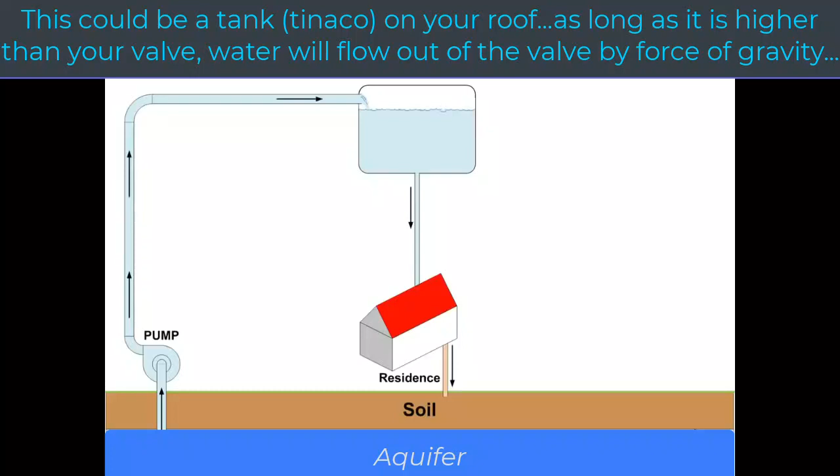So here is your public utility for water. Somewhere there's a pumping station, whether it's pumping it out of a well in the ground, out of an aquifer. Aquifer, that just means groundwater, or actually it's a pool of water in the ground. It could be an underground river as well. In Michigan, in western Michigan, where I spent quite a bit of my life, they actually pump the water out of Lake Michigan, and there's a pumping station halfway between Lake Michigan and Grand Rapids, which is about a 35-40 mile distance.

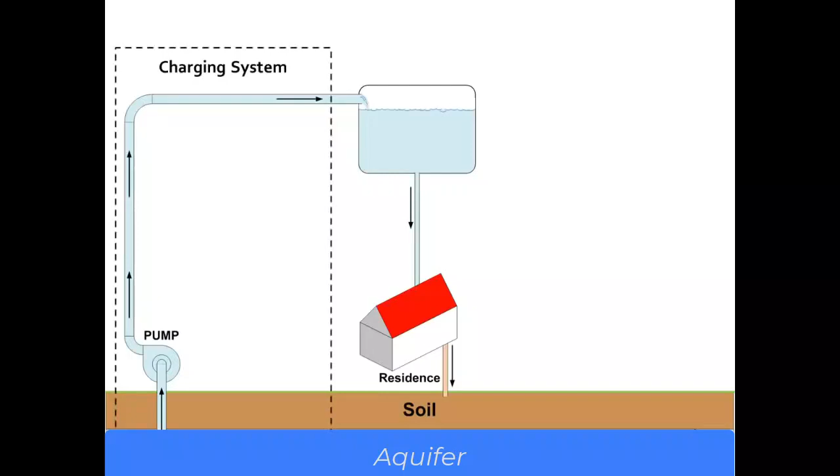So water is pumped out of some large endless reservoir of water, underground or a lake, and it's pumped into a tank. This is the charging system. So we're going to charge our system with a pump, an electrical pump that will have some controls on it, and we want to keep this tank as full as possible. The tank itself is storage. If there's no water in that tank, there is no force of gravity on the water that's felt down through the pipe. If we open a valve in the house, we have flows.

So water flows out of storage through the residence, through the drain into the soil. It could be a septic tank, or it could actually go to a waste treatment facility. We'll just say it goes into the soil in a septic tank. And if you know anything about septic tanks, the solids settle to the bottom, and then the water leaches out into the soil. And as it travels down through the soil, it's filtered and cleaned and purified, and then it goes back into the aquifer, or somehow it gets back to the source.

How much flow that you have, if you think about this, let's say that's 10,000 gallons up there. If you opened the valve, why wouldn't all 10,000 gallons come down instantly?

Well, you realize that's absurd, but we're just making a point here. Why wouldn't all of that water come down in an instant? That's because flow is limited by resistance. So pushing back against the force is the size of the pipes, the valves, changes in direction as the water flows down and goes back to the soil.

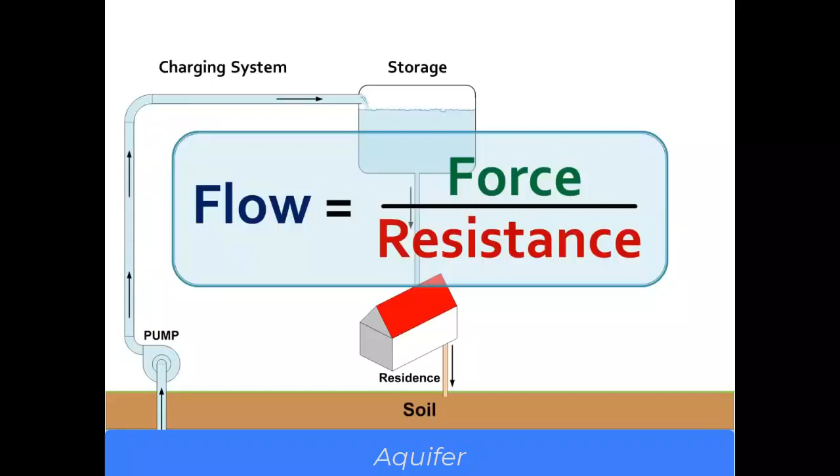Well, let's quantify our public utility freshwater system here. If we want to quantify the amount of force, we're going to do that in terms of head, and we'll do it in feet. So head pressure is the height of the top of the water column above the point where you're going to use it. And that includes the water in the tank too.

Now, if this tank were twice as large in diameter, but the water level still was no higher than what you see here, the head pressure would remain the same, even though you're thinking, well, there's more water up there. This is done with a vertical column. So if you travel straight up the pipe, and when you get to the bottom of the tank, you keep going straight up to the water level, that's what you're measuring. You're measuring the amount of weight straight down through that pipe, and that's measured in head.

You can also relate it to pounds per square inch. And what we're talking about is gravity, right? Atmospheric pressure, gravity pressure. If we take that same tank, and in a case where there's high water usage in your neighborhood and the pumping station can't keep up with the usage, and that's not uncommon.

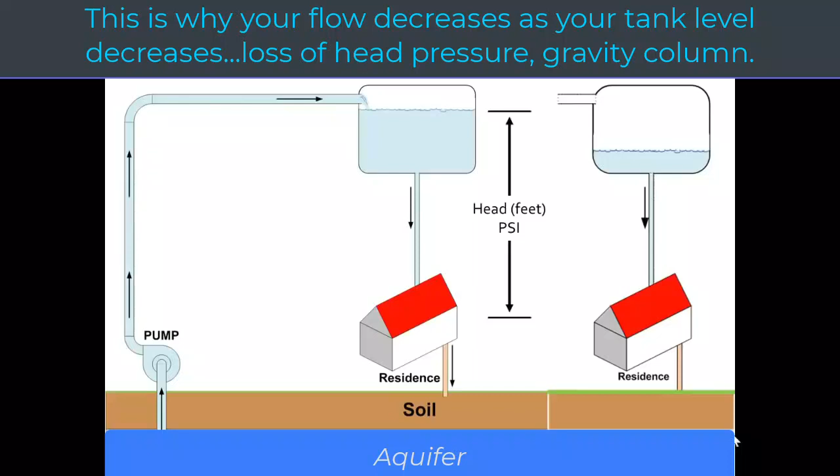However, the pumping station takes into account that that tank can get almost down to empty. As long as it can keep it from going empty, everybody has some water. But the water pressure does reduce because the head, or the height of the water, the top of the water column, is now lower, so you have less pressure.

This would be very easy to compare to a battery. When a battery is fully charged, that's like a full storage tank. As the battery discharges, like when you're starting your car on a cold winter morning and it's just cranking away, and pretty soon you start to hear it a little slower, that would be the tank over on the right. What you had stored up in your storage battery is now being depleted.

Now, although that battery can recover chemically, you're still going to need to get the car started to run electrons back in the negative side of the terminal to build the charge back up. This is a very good comparison of the voltage dropping when there's a high demand.

So almost in any household, you have at least one device that when you turn it on, the lights dim. In other words, you might be sitting there and then all of a sudden you see the lights kind of flicker. That could be because an air compressor kicked on in the garage, or the sump pump kicked on down the basement. Usually most appliances don't have that much instantaneous drain, but it's all comparable to what we're talking about right here.

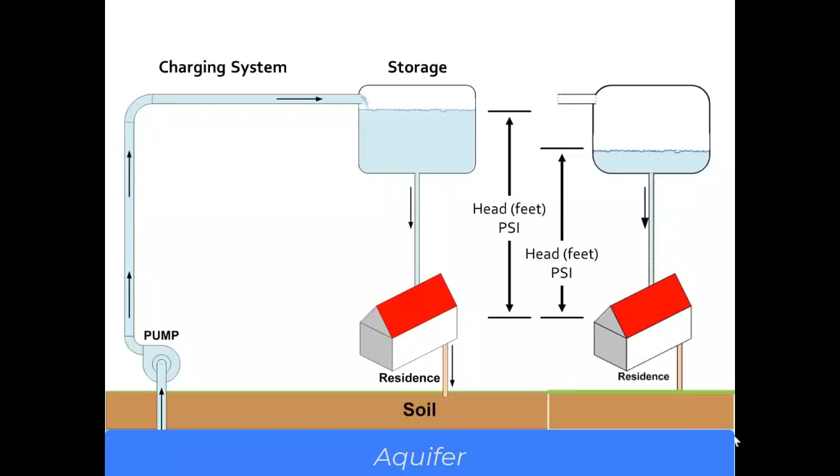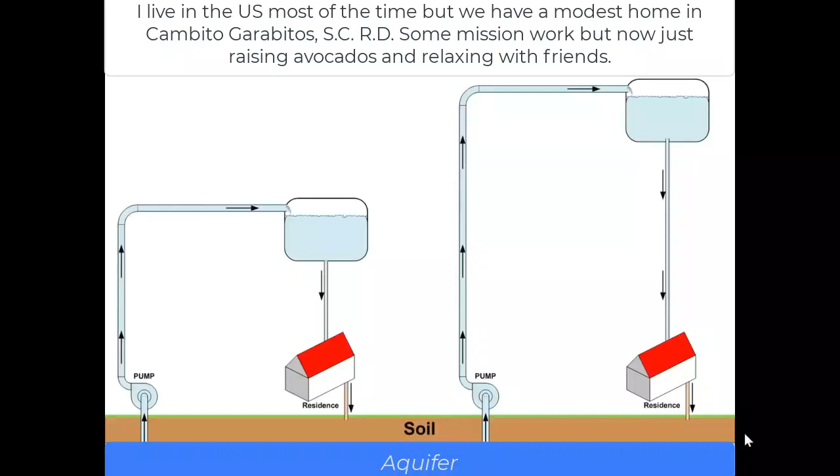Now, in my place down in the Dominican Republic, all homes down there, if they have what you would call running water, it's from a tank on the roof. So we have an on-again, off-again public water utility that sends water at different times of the day up into our neighborhood into a pipe. And we have a reservoir, a cistern, underground. And so that public water flows into that cistern.

And when we have public power, because the power goes off every day, we have an electrically powered pump that pumps water from the cistern underground to a tank up on the roof of the house. And we have a float switch inside of that tank that turns the pump on if the water level drops. So usually what happens, the power goes out every day and you keep using the water. The instant the power comes back on, the pump kicks on, it pumps water up there.

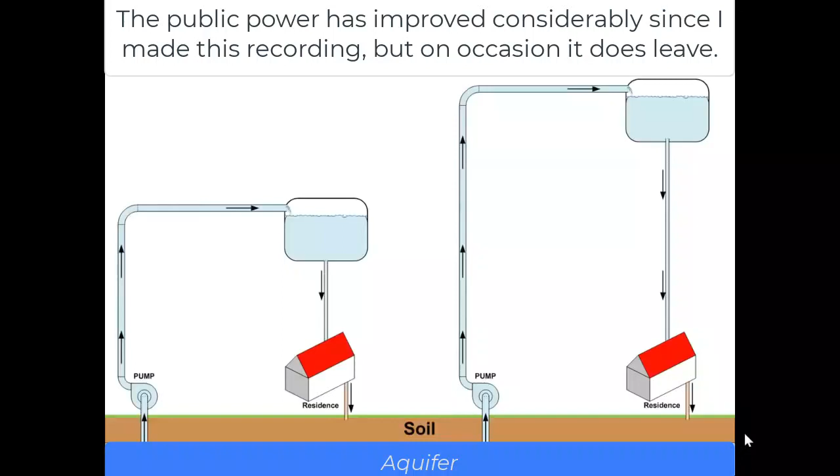The point I was going to make was that my bedrooms and office are on the second story. So the water tank is about 4 feet over my head when I'm taking a shower, and the water travels a very circuitous route to get to the shower head. It actually goes down and back up to the shower head through the hot water heater. So the water just basically dribbles out. But downstairs on the first floor, they get reasonable water pressure.

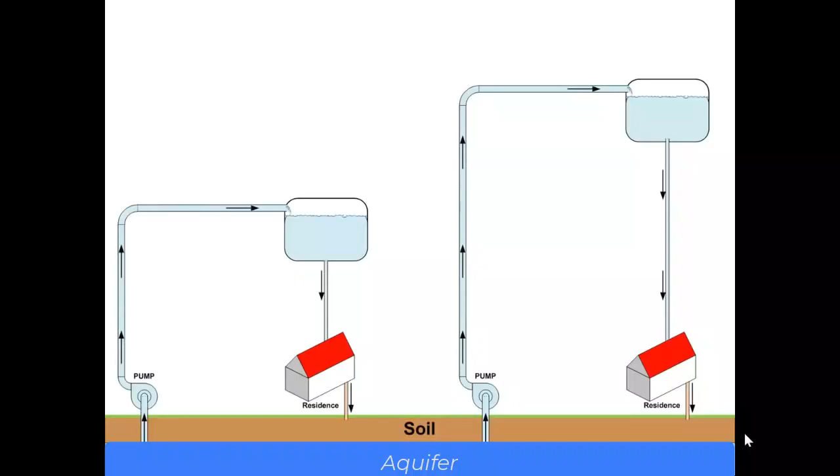I'm not complaining, but if you wanted to, you could say that this represents a low voltage system and a high voltage system. So the one on the left would be, say, 24 volts DC, and the one on the right would be 48 volts DC. It takes more energy to charge the higher system, but you get more energy out of it. You have more force through relatively the same amount of resistance.

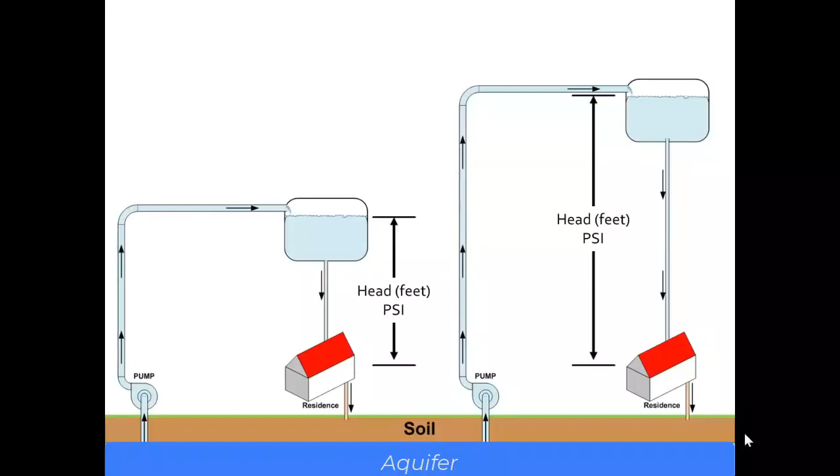Now, you could argue that there's more pipe going down the downcomer down to the house on the right than there is on the left. So there's a little bit more resistance over on the right, but believe me, you're going to get a lot more pressure from the system on the right than the one on the left.

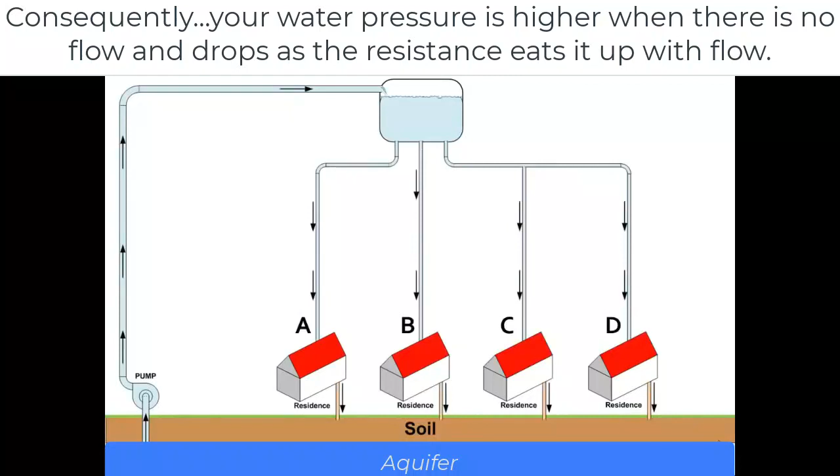Okay, we've upgraded our public utility for fresh water to include your neighbors. And you're on a little dead-end street. Now we know there's going to be more than 4 residences on a water tower. But this is good for our illustration.

Looking at this picture, if you were going to define the difference between residence A, B, C, and D, since A, B, C, and D as far as a house is concerned is identical, its sewer pipe or waste lines are identical. The only difference between the 4 is the downcomer, or the plumbing coming from the water tower down to the houses.

Now there's really only one large pipe coming down from the water tower, but to keep the diagram simple, I did something a little bit different, but the illustration is still good. House A and B are being fed directly from a pipe, but house A has a longer pipe with 2 elbows in it.

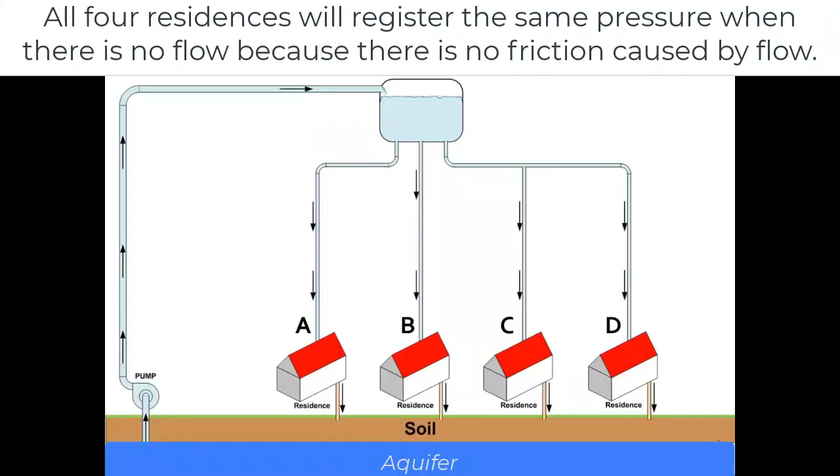Houses C and D, not only do they have an elbow or two, but both homes have to draw their water through the same pipe. So the resistance of that initial pipe is affecting the flow to both residence C and D. So that having been said, which home here, which residence, A, B, C, or D, would have the greatest flow of water? And remember, all four of the homes have the exact same pressure.

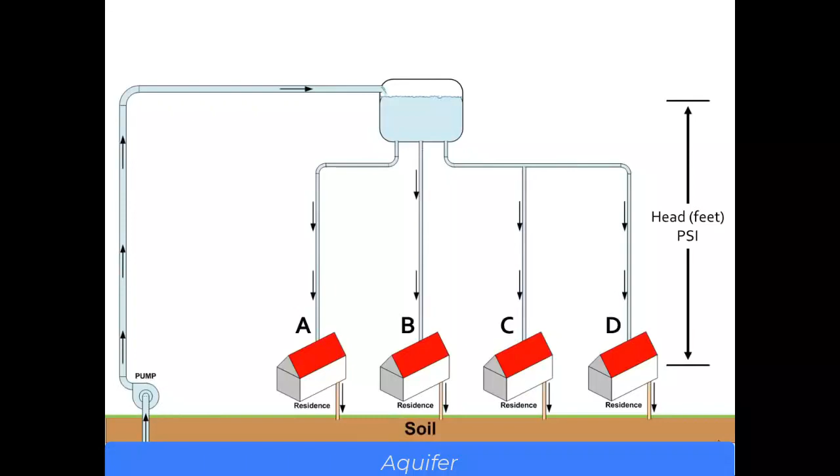When there's no water flowing through the pipes, and you were to measure PSI or pressure at the entrance to each home, the pressures would all be equal. So you're thinking, well, why would the flow be different? Well, we'll see. Which residence will have the highest available flow? B. B has the least resistance.

Now remember, when there was no flow, the weight of the water in the vertical column was the same because it's based on the height from the point of entry up to the water level in the reservoir, the tank, the storage unit. But once the water starts to flow, the pressure, some of it is dissipated in friction against the sides of the pipe.

Which residence would have the lowest available flow with this given system? Well, A would be a little less than B simply because it's got a longer distance to travel through the pipe, and it's got two direction changes, and these direction changes produce heat from friction as the water travels with more pressure against the outside of the turn. Now that's small, but it's still there.

Residence C and D, they share one common pipe coming out of the reservoir, so that means C and D are definitely going to be lower than A and B. Even though C is the same as A concerning pipe and distance, because it has to share the flow from one common downcomer with D, that puts C less than A.

So which one would have the lowest available flow? Well, D. Not only does D have to share a downcomer, but it has a greater length of pipe to travel than A, and it has two elbows in it, just like A does, but it's a longer distance, plus it has to share the downcomer.

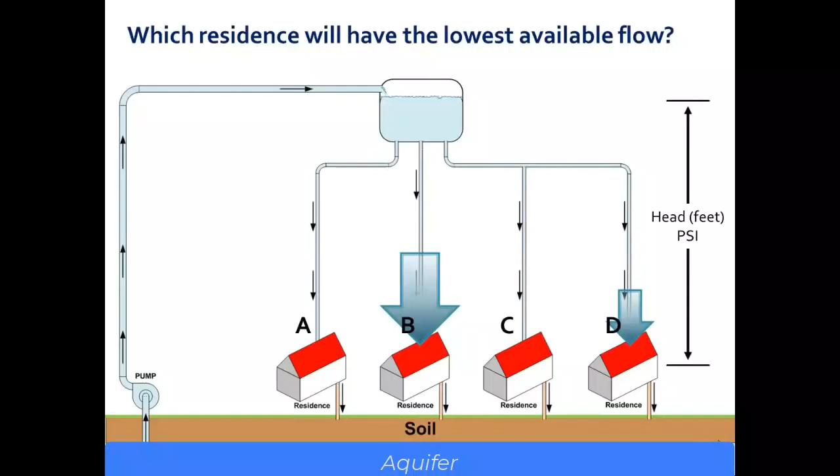Okay, what determines how much water flows through one of these residences? Now, this is not a trick question, but you've already been given the answer. Flow equals force divided by resistance. So when we compare these four residences, we compared the resistance. The force is equal, but the resistance is greater in D. C is greater than A and B, A is greater than B, and B is the least. B has the least resistance to flow for the same force, so it's going to have more flow.

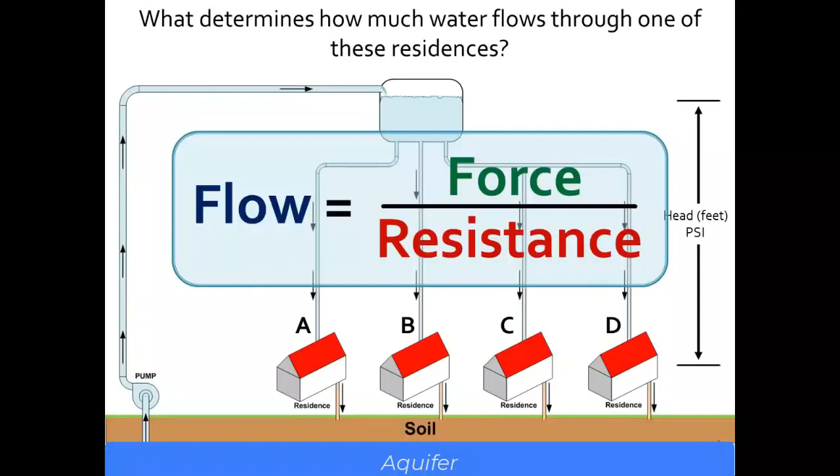Okay, so how could we control the force? All of these families are paying the same rate to the public utility for water usage. However, the folks in House D happened to visit the folks in House B, and they noticed when they went in to wash their hands before dinner that they had a lot more water pressure and more flow out of their faucet. And they thought, well, maybe they've got better faucets or better plumbing.

And a couple days later, the husband's out in the backyard at House D, and he's got a hose hooked up to a spigot, and he's spraying something, and his neighbor's got the exact same length of hose. They happened to be together when they bought them at the local hardware store, and he can't get his water to shoot out as far as the other guy's.

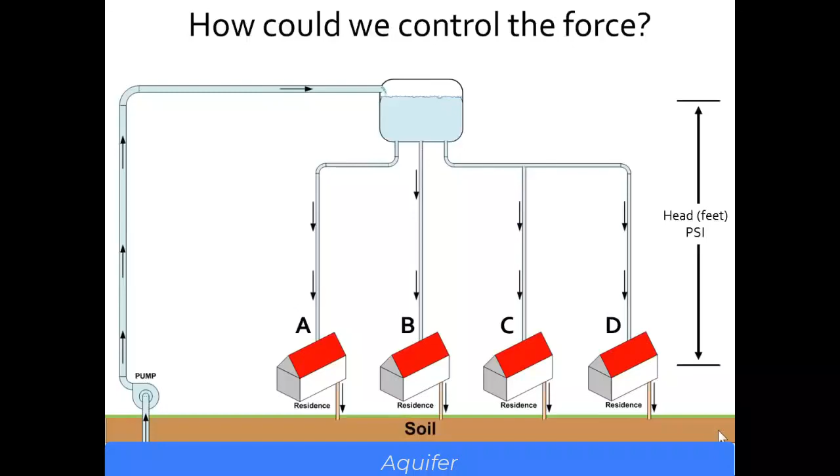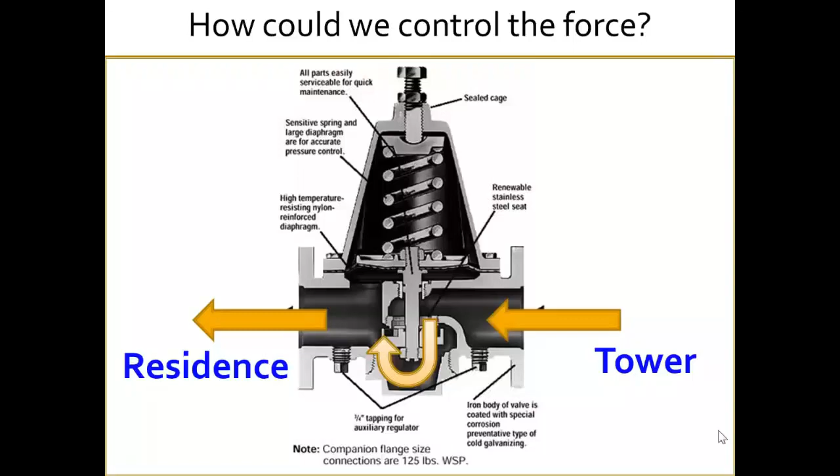So he starts checking, and pretty soon he realizes he does not have as much water pressure as the family in A and B. So, since they're all paying the same dollar, the power company had to do something to equalize the pressure. And so they came up with this device. It's called a pressure regulator. Now, I realize that this is not electrical, but it is demonstrating the balance of force to control the force.

Well, I hope that you learned something from this presentation. I actually made this quite some time ago, and I re-edited it to try to trim it down a little bit and to make it more interesting. We ended with introducing the idea of a regulator, and that is a mechanical regulator that opposes gravity with a spring. And we will pick this back up in another episode.

So if you were to back up into that video, the last image was a pressure regulator that had a spring with an adjustment, and you adjust the spring to oppose the pressure coming in from the tower to maintain a constant pressure on the house side. Now, if the pressure from the tower drops below the setting, then the pressure in the house is going to drop too. So a regulator only works as long as the force you're regulating is greater than the set point that you set it to.